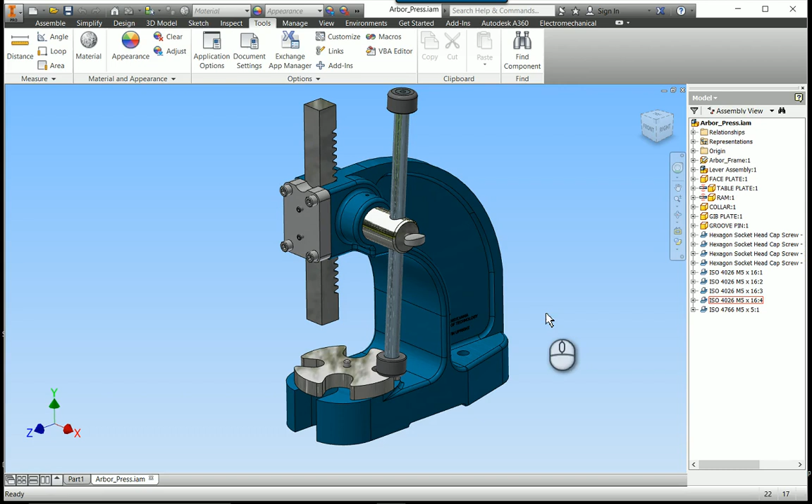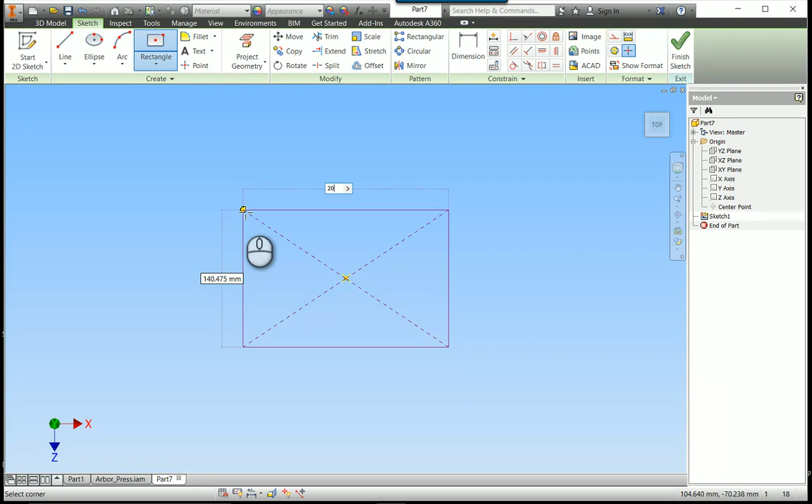Start a new part, and I'll tell it to do a metric part. This time I'm going to start out on the top plane, so I will go to the top view on the view cube, and I'll start a new sketch, a 2D center point rectangle. I'll put in the dimensions, let's say 200 that way, and I'll hit tab, 100 this way. It all turns dark, it's fully constrained.

I like to rotate around a little bit before I do my extrusion, so I'll rotate around, and I'm going to drag this arrow and go down instead of up, and let's say I'm going to extrude that a distance of 50. And I'll do a new sketch on this face.

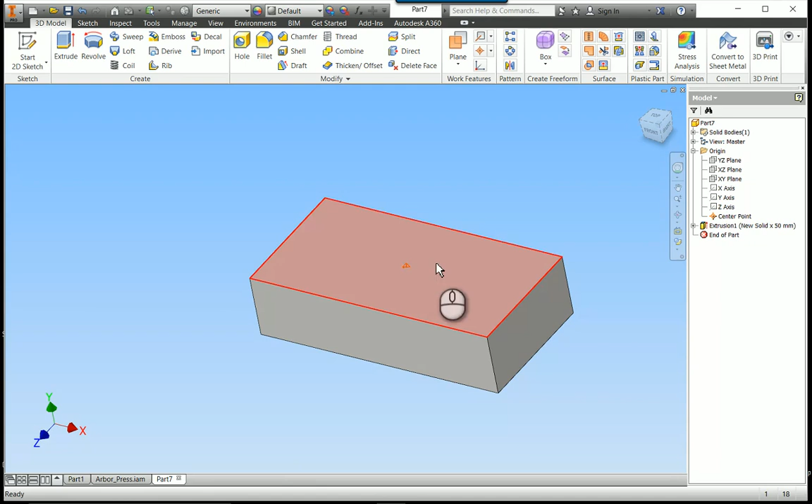Now I have a choice. I can either do my sketch on this face, or on the XZ plane, or the top plane. Let's turn on that origin center point, we like to keep that visible. You create more robust parts when you create your sketches on these origin planes rather than creating your sketches on these faces. So whenever possible, I don't sketch on a part face.

Using these origin planes is called using the Born technique, B-O-R-N, where it stands for base, orphan, reference node. And so I use that Born technique whenever possible.

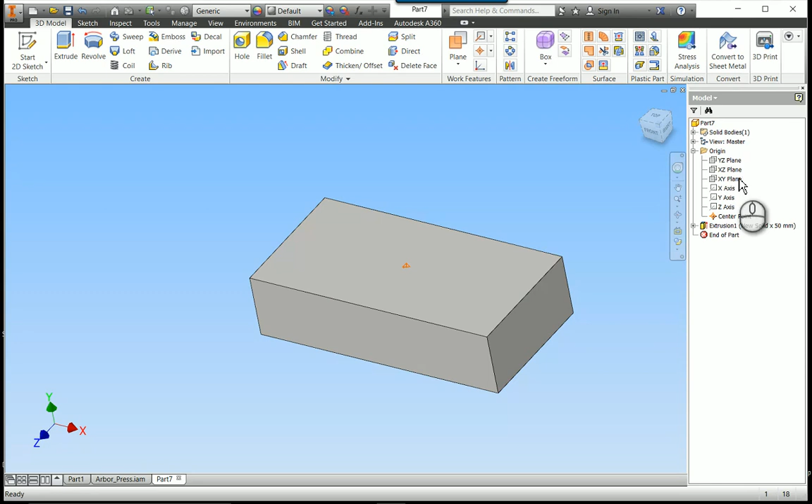So I'm going to start a new sketch on that work plane rather than on the part face. And I'm going to project geometry, and I'm going to project this entire face. Now normally I project the individual edges, but I'll go ahead and click on that face, and it projects the edges of that face.

I'm going to offset that a certain distance, and then I'm going to dimension that distance, whatever I want.

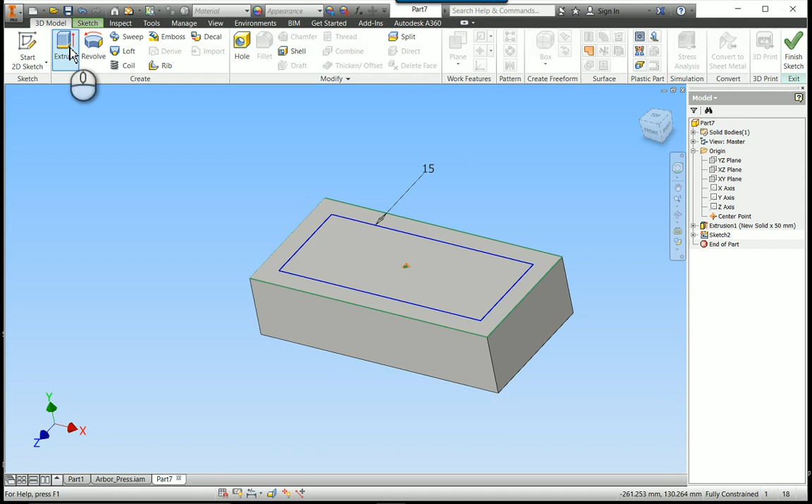Okay, let's see. I think what I will do is change these lines on the outside to construction, and I only need to change one of them. So I'll get out of the dimension command, change one of those to construction, and then do an extrusion. By changing that to construction, I don't get this area in between in that projection, I'll just get this area.

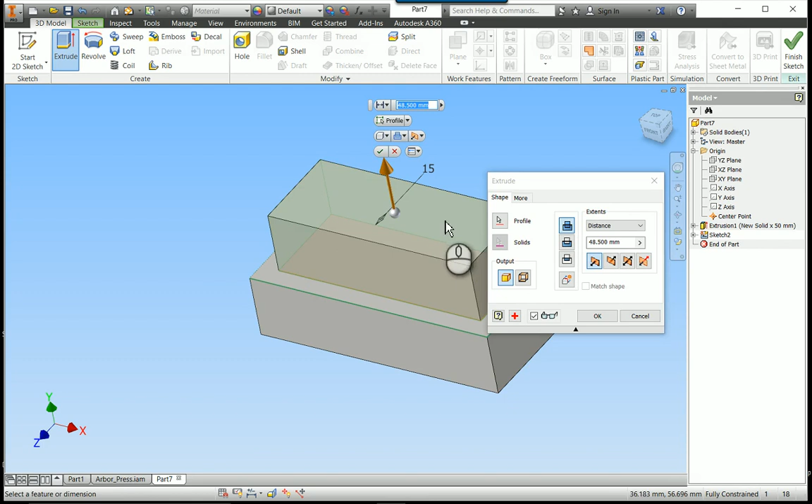I'm going to tell it I want to extrude that all the way through the part, so I'll say through all. Right now it's on join, so this is join, and join is green. Or it gives you, if I bring this out here, a green result. Cut is red. I'm going to tell it to do intersection, and let me flip that direction, and I'll tell it to go through all.

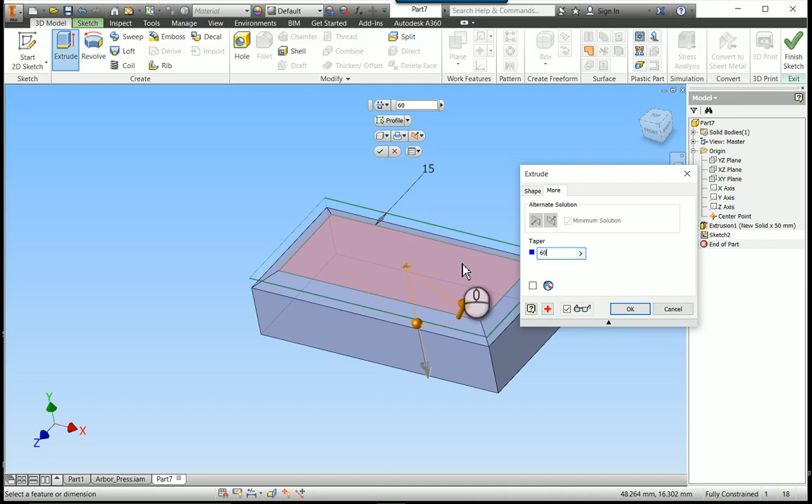If I go ahead and accept that, it's going to cut away everything on the outside of that. But let's click on the More tab, and let's put an angle on here, say a 60-degree taper. When I do that, in effect, I'm putting a chamfer on these edges, which I could have done as a chamfer, but I just wanted to show you the intersection command, which few people use, and later I'll show you some other ways of using that intersection.

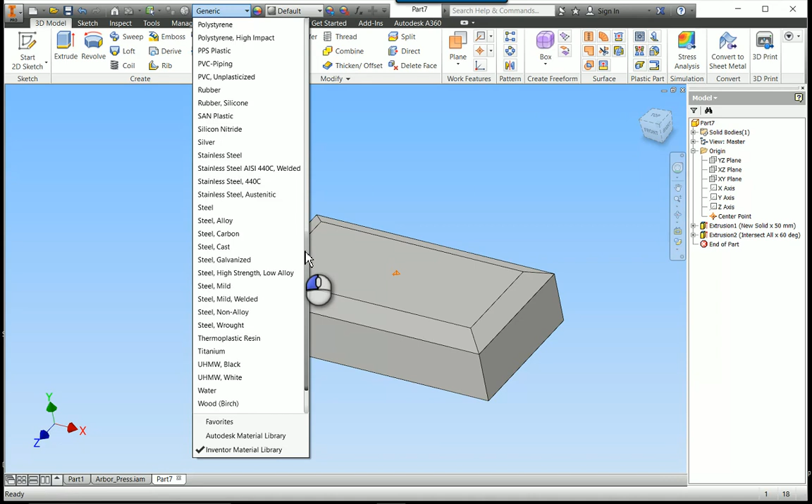Alright, let's come up here, and I'm going to change this to a wood material. Now be careful, because there are wood textures, and then there are wood materials. A texture is just like painting it, it's not actually giving it the material property. So if you want the material property, you have to come over here and select the material, and then it gave it that texture appropriate for that wood.

I'm going to create a plane above this part, and I'm going to turn on the visibility so you can clearly see what I'm doing. So I turn on the visibility of that XZ plane, and I'll come up here and click on plane. I'm going to click and drag and offset this plane.

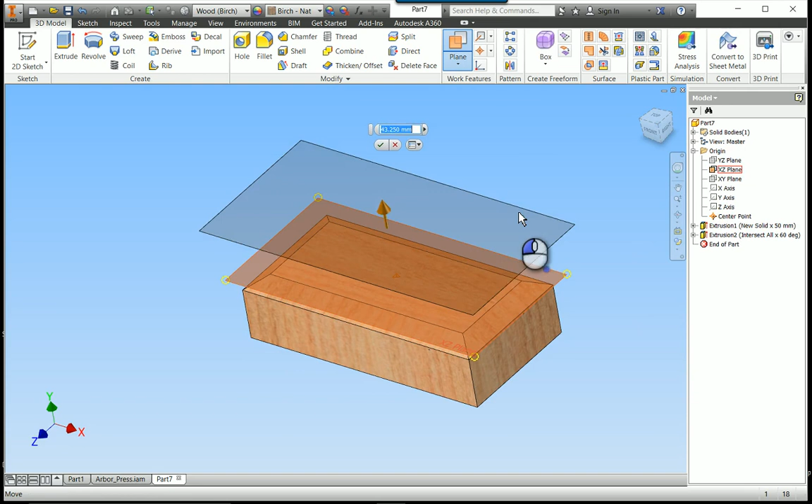Now for what I'm doing, I don't really care what the distance is, but I'll go ahead and put in 25, and I'll say OK to that. I'm going to hide this origin plane, which I can right click to turn the visibility on and off.

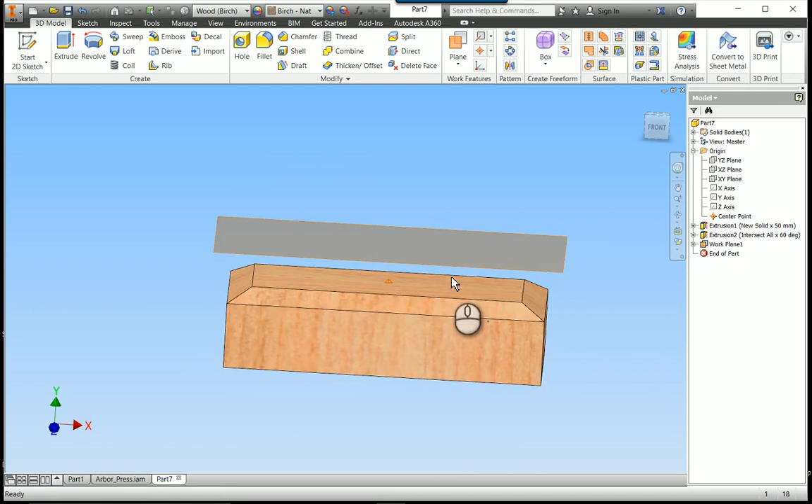So I have this plane that's 25 millimeters, and this distance doesn't really matter. But notice on this plane there's a lighter color side and a darker side, this is a blue color, and this is a red-orange color. So when you create a work plane, it has a front side and a back side. The front side is the lighter color, the back side is the darker color.

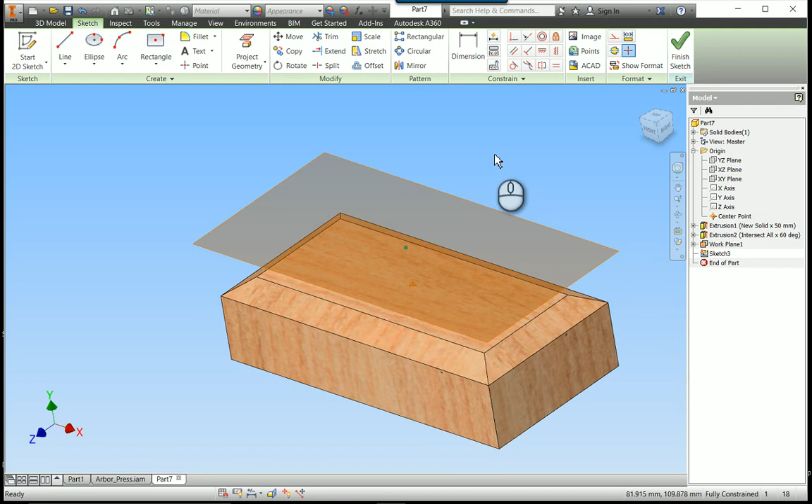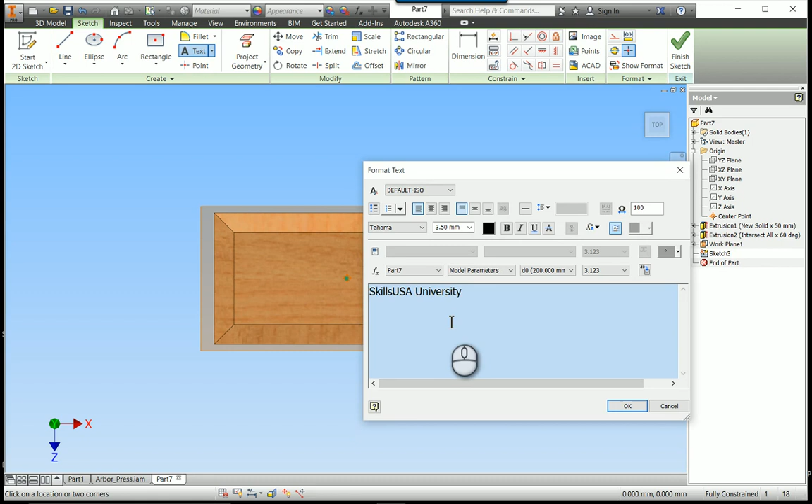Alright, I'm going to start a new sketch on this plane now, and I'm going to type in some text. So I'll get a text box here, and I'll type in a little bit of logo type text. I'll highlight that and make this text larger, so let's make that 15, and I'll go ahead and say OK to that.

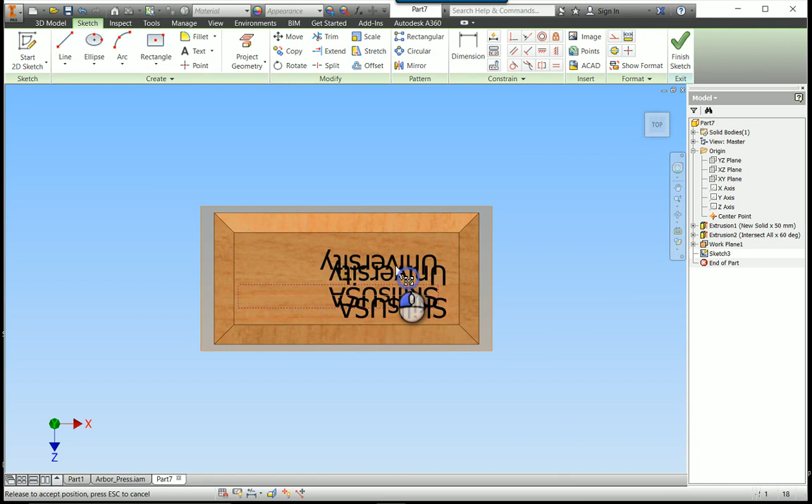Now I see that it's upside down relative to the way I'm looking at this on the top view, so I'm going to put a dimension on this, and I can drag this around. Here's that text box that I originally started with. I'm going to put a dimension on either the vertical or horizontal edge of the text box, it doesn't matter which one. So I put one dimension on there, and after I dimension it, I can drag around.

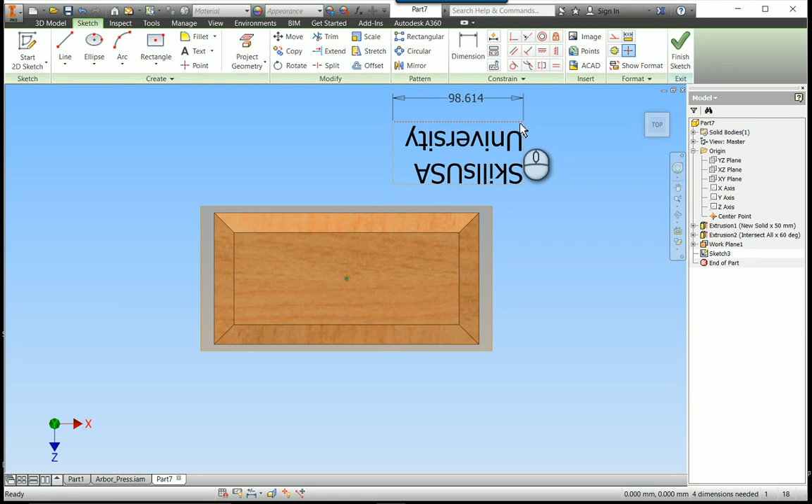Let me get out of the dimension command. I can drag around one of these endpoints and get this text box to whatever orientation that I want.

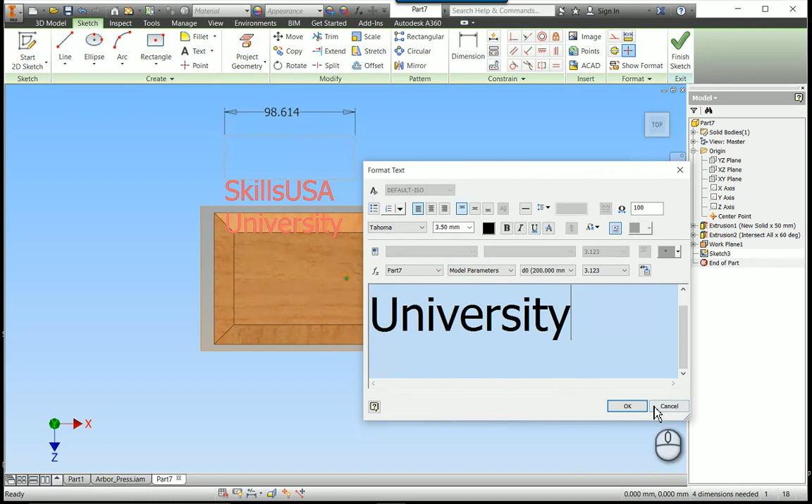So one of the questions that comes up quite a bit is how to get text at some kind of angle, because if I double click on this dimension and come in here, there isn't an option to get the text at an angle you want. But you can put that box, and now I can put a horizontal or vertical relation on that text box, and that text will stay horizontal, and you can go in and put whatever other dimensions you want for locating that text.

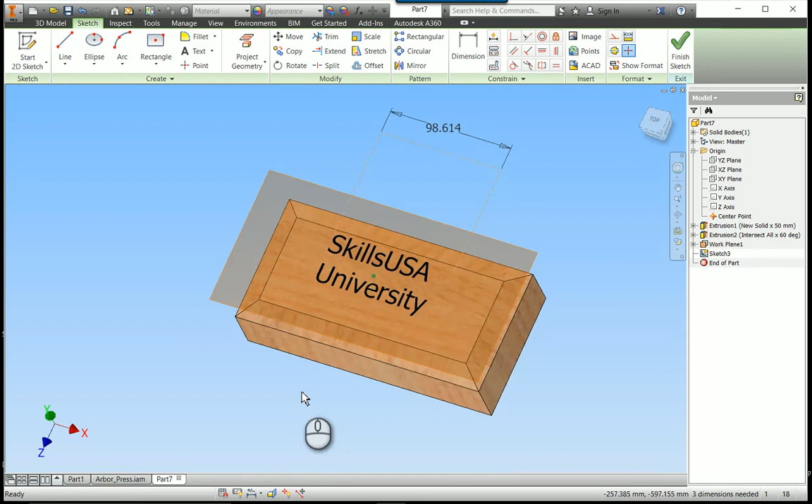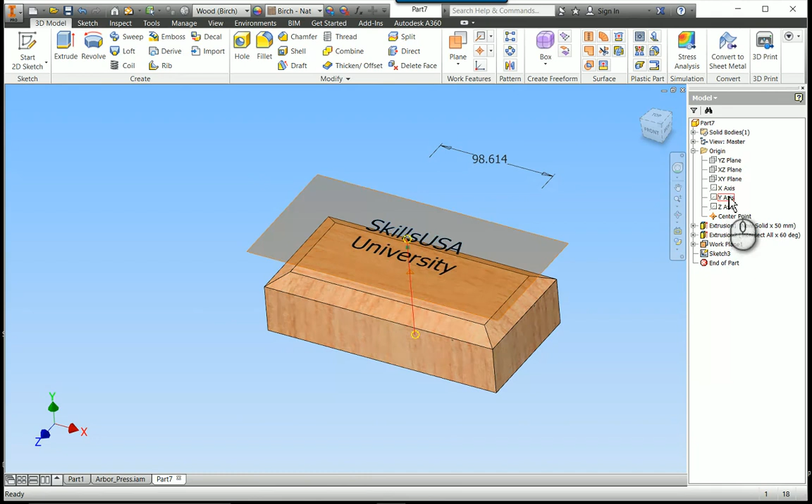Now let's say I was making a rubber stamp, so I'm going to do an emboss of this as raised lettering for some kind of stamp. But in that case, I need a mirror image of this text. That's why I offset this work plane up here, because I can't change the origin planes, that's that BORN technique, base orphan reference node. You can't make any changes to those, but I can make this change to this offset work plane.

So I'm going to right click on that offset work plane and tell it to flip normal. Remember, we said there was a front side and a back side. So when I flip normal, it now changed this to the back side of the text, or the work plane, and now this is the front side. So now my text is flipped around.

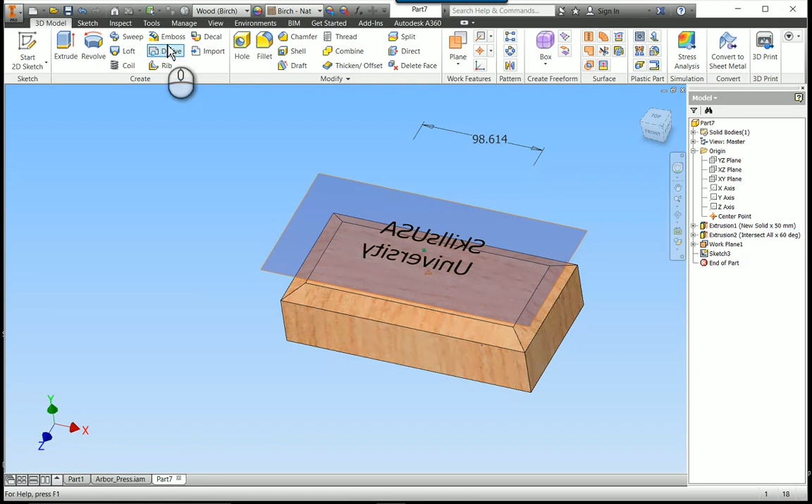So now if I want to do that emboss, I can select that text, and I'll select that face that I want this text on. I'll tell it 1 millimeter high, and if I want to change the color of that text, I could click on this color swatch and pick some other color. When I say OK, we see that color swatch now, and I'll go ahead and say OK to that, and emboss that.

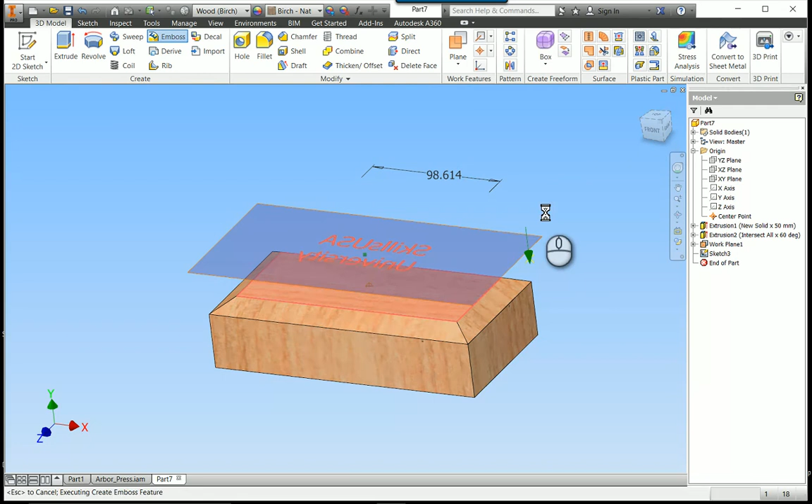I can turn off the visibility of that work plane, and so now when I stamp that, it will be right reading when I use this stamp to stamp my ink onto whatever I'm trying to imprint.